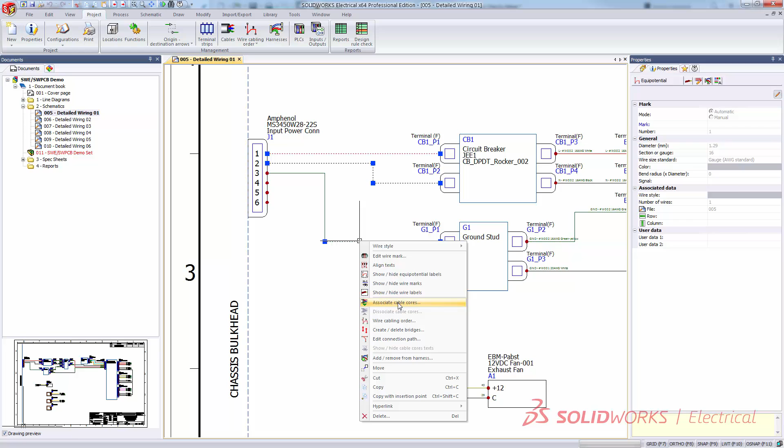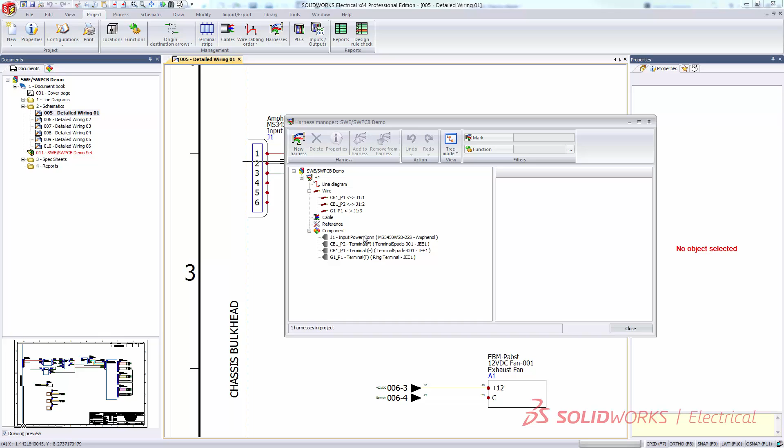Hello, this video is going to explain how to add your clips, your sticky backs, your zip ties to a harness so you can create a harness drawing. A few things you need to do first, before you go to the drawing as you normally would. Make sure on the electrical side that you have your wires and your cables or your harness set up correctly. If you are using cables, highlight those wires and turn them into a cable, associate cable cores, or take those wires and connectors and right click to turn them into a harness.

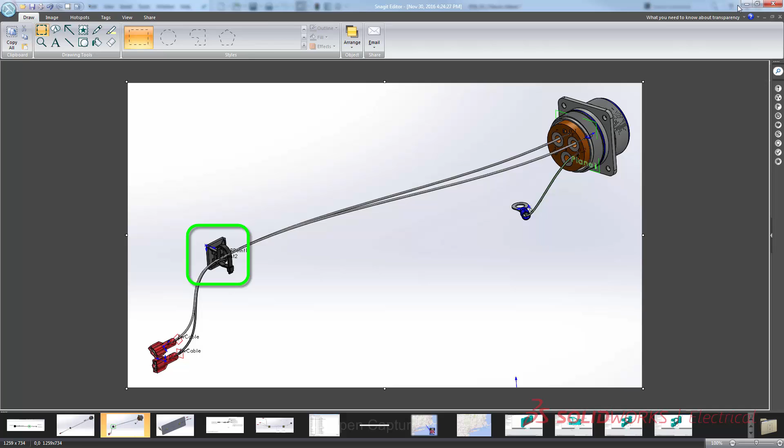We have our power connector to a couple terminal spades, a ring terminal, and we're going to add our sticky back in. First, let's go ahead and set up the appropriate information. I turned off the EW path in here for this instance because I'm going to auto route to the sticky back, and we'll see how that works in just a minute.

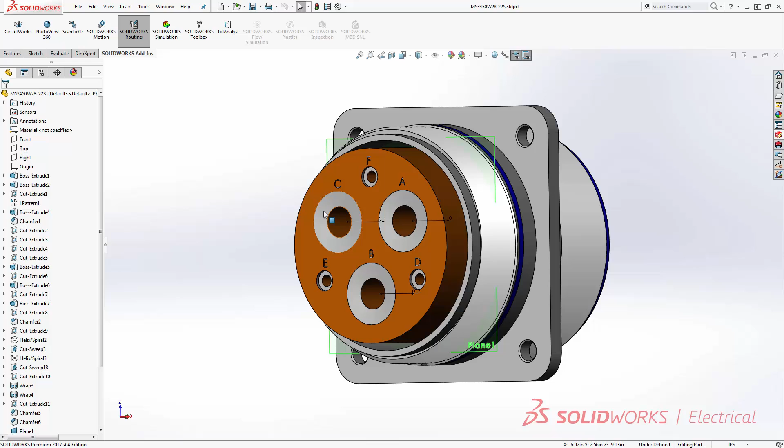Every component we have that we're going to route to needs to have, you can see those little black arrows in there, 1, 2, 3 in here, potentially 6 if you need to. Those are your connection points associated to your connections on the 2D side. Those are already set up, but what we're concerned with is how we get it through the sticky back. We need to go ahead and add some intelligence to those.

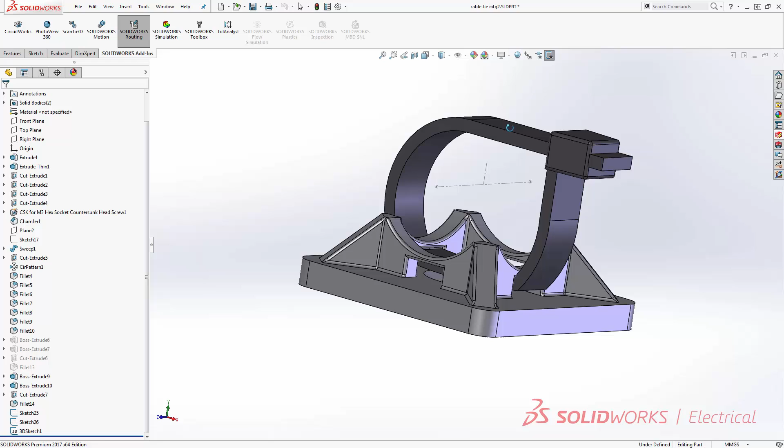So I'm going to go ahead and open that part - I'm pretty sure I have it open already. Yep, so we have this part here. You can see these sketch lines in the middle here and a couple sketch points. I've gone ahead and set these up ahead of time.

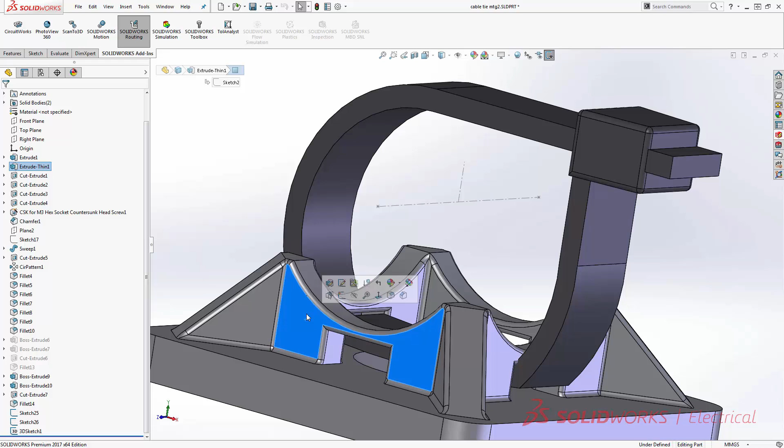We're going to use those in the routing component wizard that's through the electrical tab, not the electrical 3D tab, but the electrical tab. To set those up, I simply set up a sketch off of this plane and added a sketch point at that point, then did the same thing - created another sketch plane off of that and another sketch point. Then I used a 3D sketch, under the sketch tab, 3D sketch. I used construction lines and connected the 2 points, and then from the midpoint of that I created another small construction line that goes along, in this case, my y-axis.

Once those are set up, we want to go into the routing tab, tools tab under routing, and go to the routing library manager. Once we set that up - this could take about 10 seconds to open - we're actually going to use those sketch points and lines to add that intelligence to the sticky back. We'll give this a second to open - there's a whole bunch of features in here.

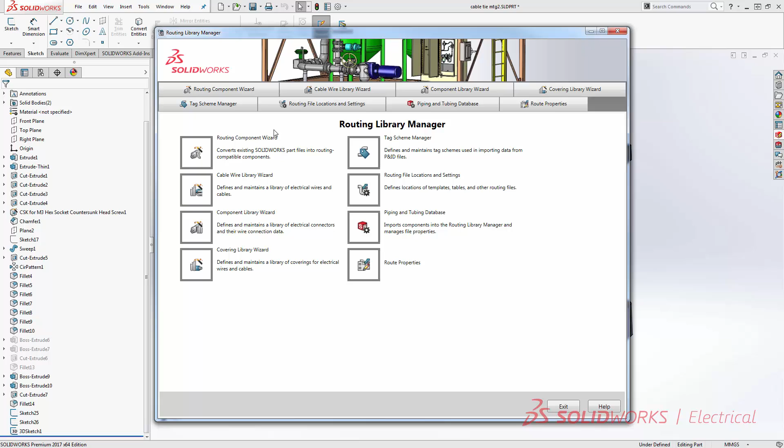What we want to do is go to the routing component wizard, and you have different options as far as what type of route. For this one I'm going to use electrical, and then choose what type of component it is - I'm going to use it as a clip. There's a whole bunch of different ones you can actually choose from.

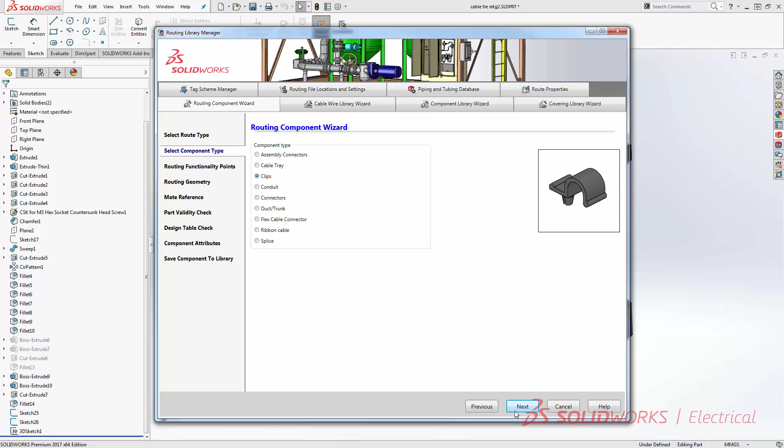So we'll go ahead and set that up. Now here, on the right hand side, there are those sketch points that I set up already. I'm actually going to add these to this component.

Wait for the window to open up again. We'll add another one. And now we have our two R points set up.

So the next thing we want to set up is our axis, our clip axis and our axis of rotation. So we'll go ahead and create a new clip axis, and we will add our axis of rotation.

Now these are required to have in there. You can see in red, there's a little key at the bottom to let you know what's required and what's not.

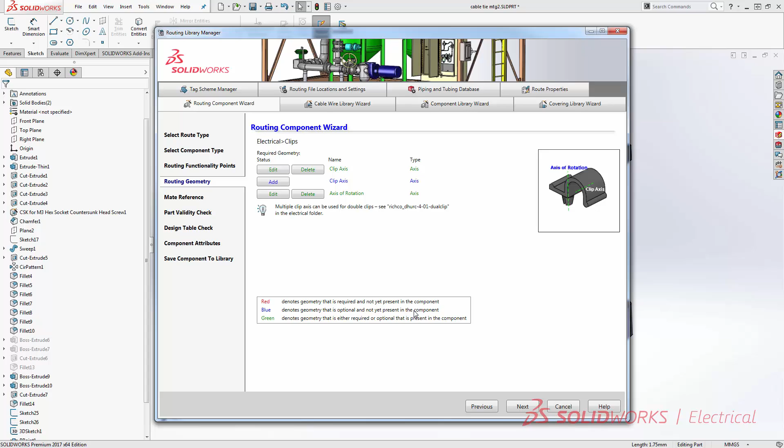And then finally, we will go in and set up a simple smart mate. You can be as detailed with the mating as necessary, but for this I'm going to go ahead and choose just the bottom face.

I'm going to set it up as a coincident mate so that when I drag it into my model, my assembly, it's going to stick right to the wall.

From there, you can just use a parallel mate or some other type of mate to make sure you get it lined up with all the other sticky backs, or up in the corner somewhere in the cabinet.

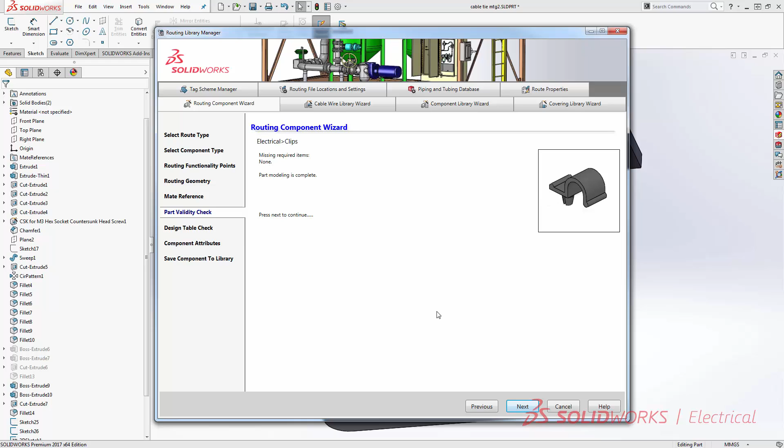You can also do some other information with configurations. I'm not going to bother doing that right now as far as setting up.

So I'm going to save this, and I can close out of that. Of course, if you have other components, you'd want to set them up in the same manner as this.

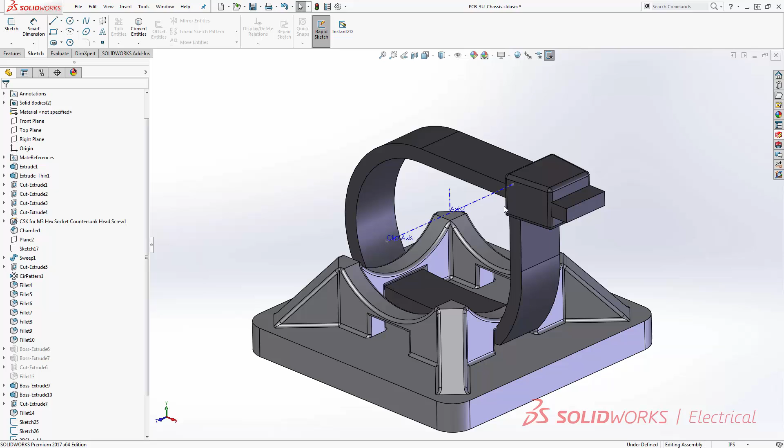So what we have is, we can close that guy out. So once we set that up, another step we have to take, and you might already have yours set up, there's the option of the electrical, adding your electrical design library.

We can see all these parts are already in my design library. If they're not in your design library, what you'd want to do is go to the top here, just above SOLIDWORKS content, and there's the add file location.

In here, you can go to your specific location for that electrical folder, and this is my directory. It might be similar to what you have: Program data, SOLIDWORKS 2017, design library, routing, electrical.

Obviously, depending on what version you're running, I have 2017, if it's 16, 15, so on and so forth. It also depends on whether or not you have a server installation. But just to kind of get an idea of where to find that if you can't find it on your computer.

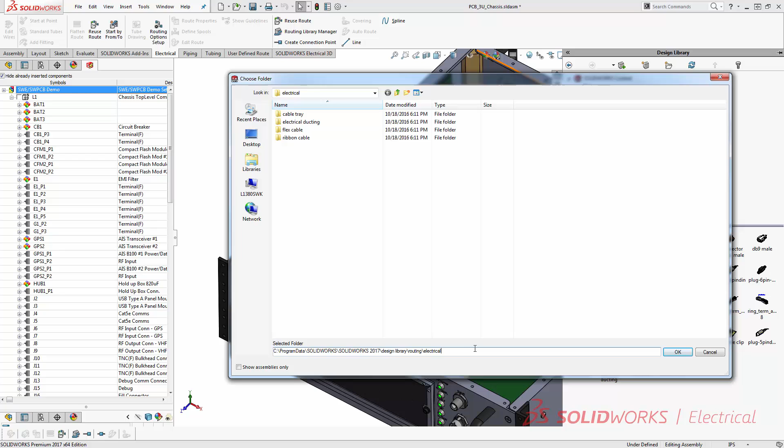So once you get that in there, there's a whole bunch of different folders inside that electrical design library, and what I want to do is actually grab that new one that I just made, that cable tie management number 2, and drag it into... actually, nope, I don't want to do that yet.

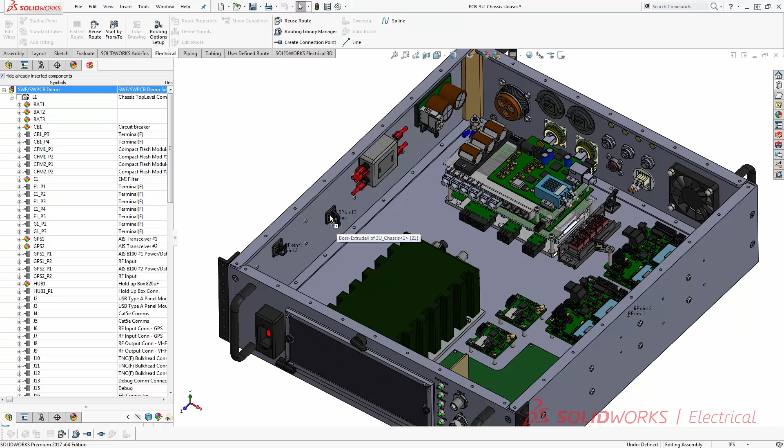Don't want to put that in there yet. I want to put that in after, actually.

So first thing I want to do is actually go ahead and route my harness. So I'm going to start routing my harness.

I want to pause for just a second because it could take a minute or two, so we don't have to sit here and watch the whole harness being routed. In order to route the harness, I'm going to go ahead and route harness. I only have one harness in this, and I'll let the software do what it needs to do, and I'll be back in just a minute or two.

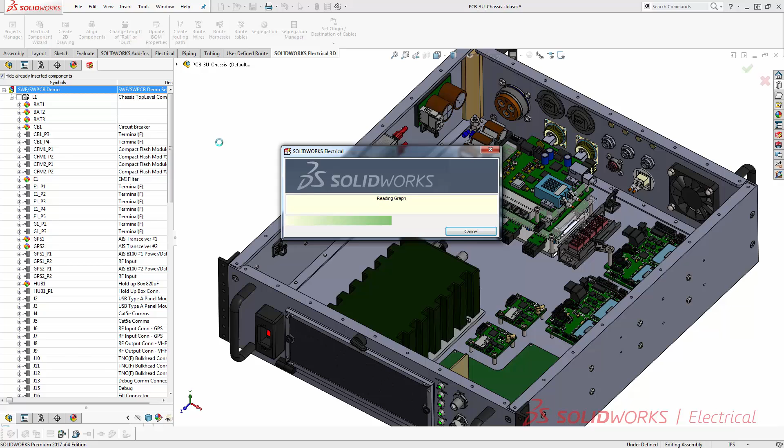Okay, so my harness finished routing. From here, what we have is, it looks like 3 wires, but the main reason why it doesn't have any type of insulation around it is because I did not have an EW path, so the shortest path of resistance just went from point A to point B. Which isn't a problem.

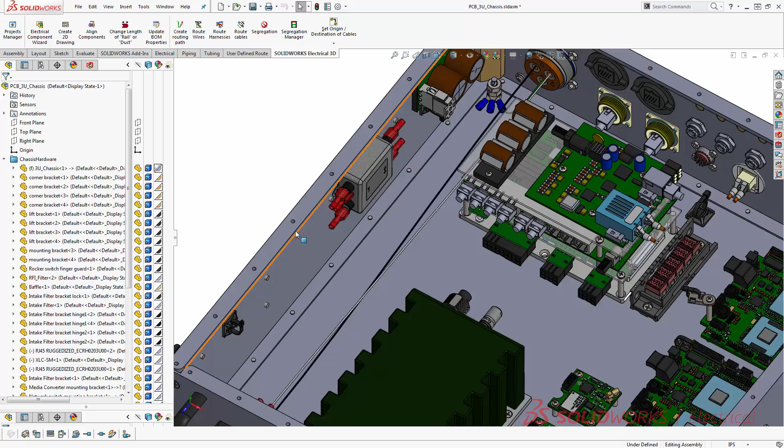So what we're going to do now is add a sticky back to our harness. Inside of our feature tree, we have our new harness assembly, and what I want to do is go in and edit the route of that assembly. Notice that the feature in the tree turns blue, and that's what we need it to look like. So once we're in edit mode for that harness...

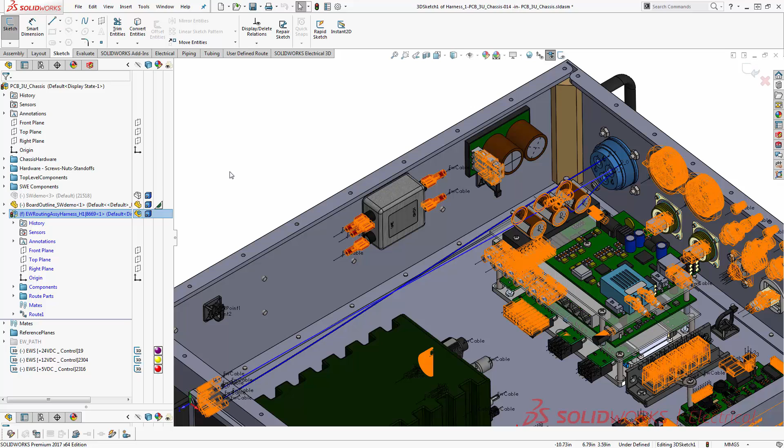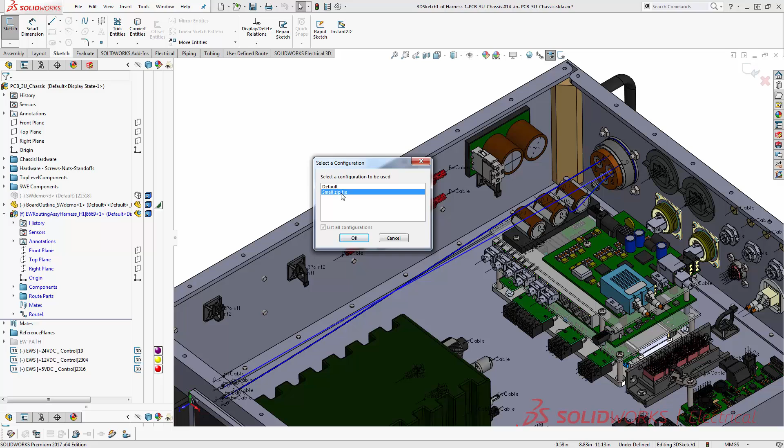now we can come back into that design library, the electrical tab, and find the part we want. Let's go to that cable tie we edited before, drop it in, set my configuration, and now this component is part of this harness. If we go into the harness and look at its components, we can see that we've added that cable tie to the harness.

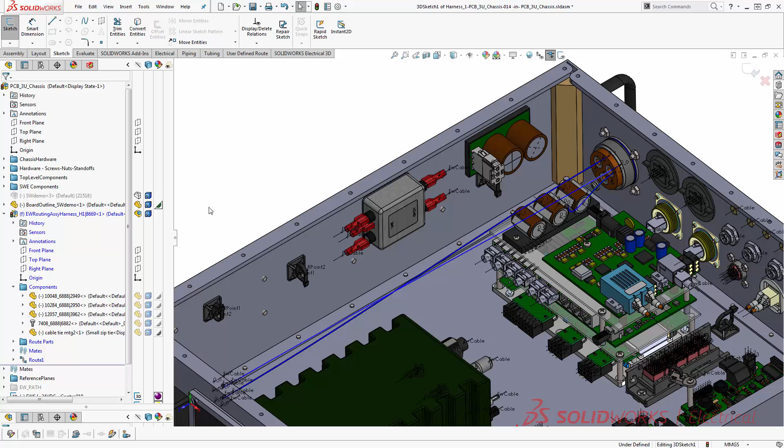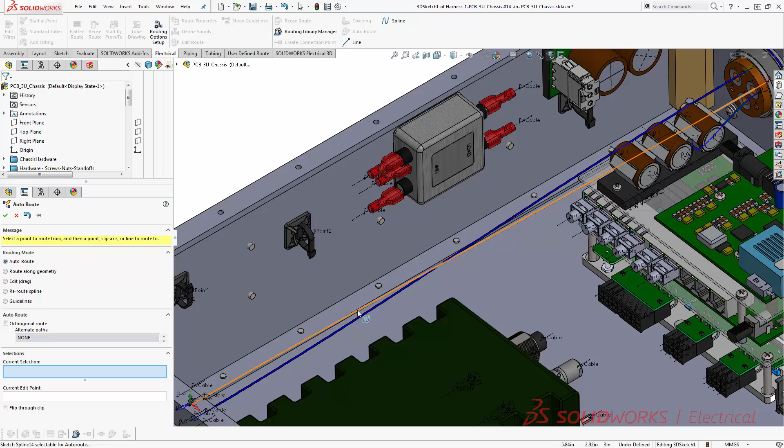So once we set that up, we can start snapping these lines, these cables or wires, or even the full harness, into that zip tie. To do that, we go to the electrical tab, auto route, find the sketch line, and use that axis line we created before, the clip axis, like so.

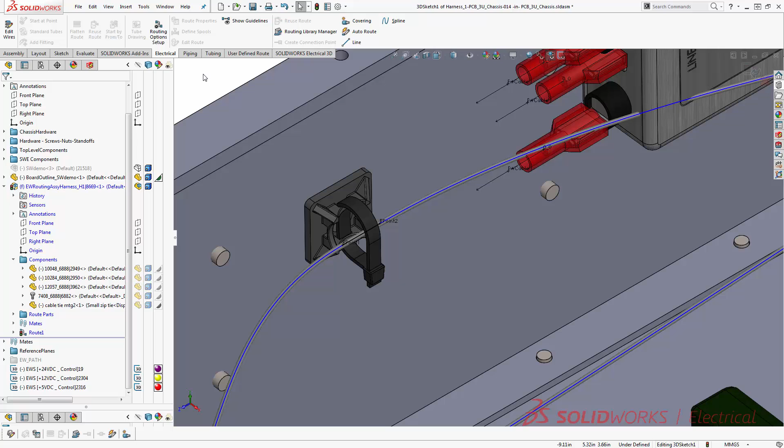I typically like to use, you don't necessarily have to, but I find it works a little easier for me, just auto route, route one cable, green checkbox to end the command, and if I have multiple cables to route through that one, I'll go back and do it again. And just like that, I have my two wires going through there.

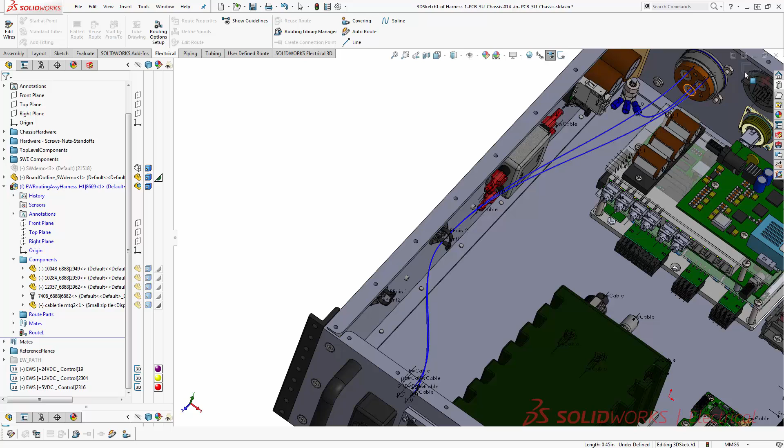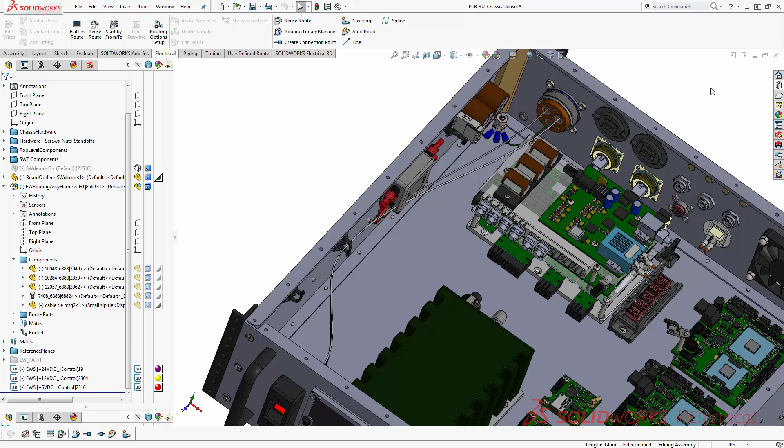So from here, notice in the top left corner I'm still in edit harness mode, so I want to back out of that and go to the top level assembly. We can see our harness is now a part of that.

Obviously it's going through here. I'd probably want to add another clip somewhere down here, maybe use this one, and drop that down. The clip needs to be a part of the harness ultimately for it to route and create in that drawing.

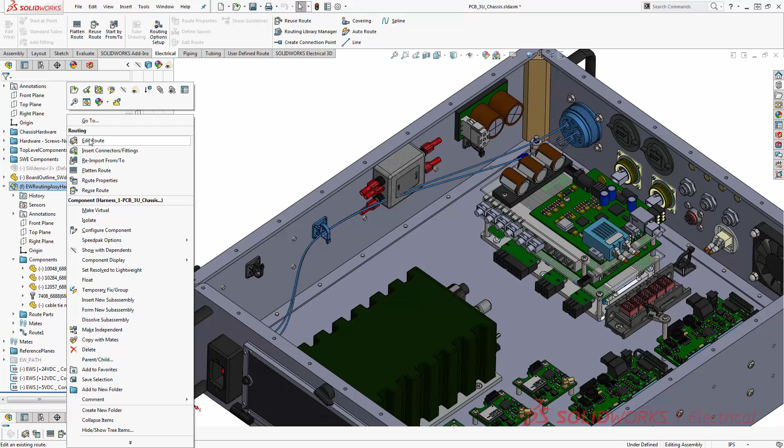So from here, to get to the drawing, I want to go ahead and right click on that harness and flatten the route. From here I can take a look at all the different views, and we can see that I have my clip in my harness.

And now it's just like before with all of your drawing tools. You're going to go to either annotation or manufacturing, and you can set the orientation of how you want it laid out on a sheet. For this though, in order to show the clip, you need to make sure flatten clip is on. Then from there you can also drop it on a sheet if necessary.

And that's pretty much it, that's the gist of how to add that. It's all those little tiny things that make sure you're able to add that to the harness first, giving that clip the intelligence, and then of course adding that after you've routed, by editing that route.